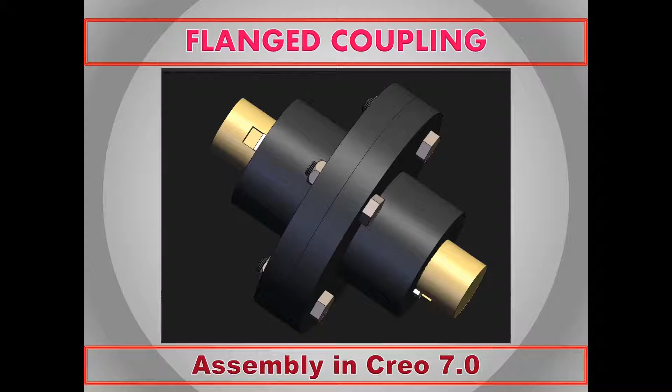Hello friends, in this video we are going to see the assembly of a flanged coupling in Creo 7.0. Here we can see the individual parts of a flanged coupling.

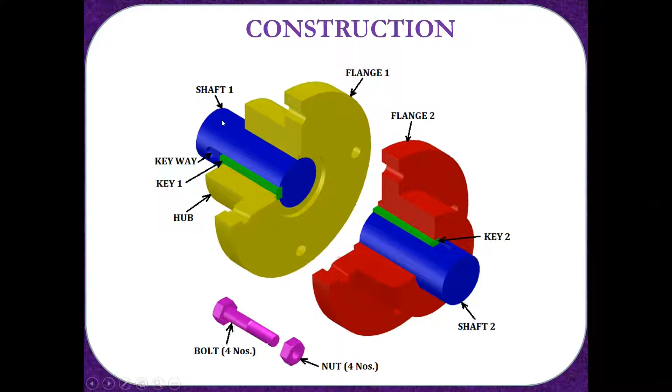While assembling the parts of a flanged coupling together, a shift of 90 degrees is provided between the first key and the second key. Here we can see the individual parts of a flanged coupling which are already modeled in Creo 7.0. To ensure the proper orientation of the key after assembly, red color is given on the thick end of the key and blue color is given on the tapered surface.

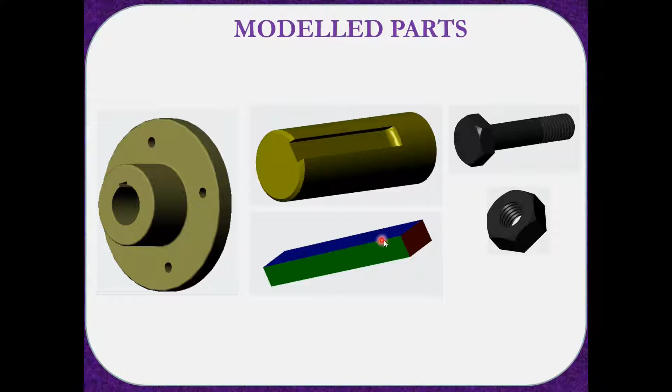Now let's move on to the assembly of a flanged coupling. Open a new file, select assembly. Let's change the file name. Remove the tick mark on use default template. Give OK. Select millimeter Newton second assembly design absolute. Give OK. Go to assemble and select assemble.

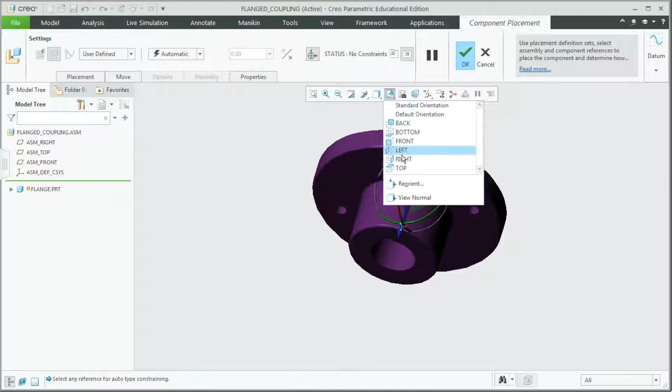Select the first part as flange. Open it. Change the view into right view. Select the default option. Now it is fully constrained. Give OK. Switch on the axis display and plane display.

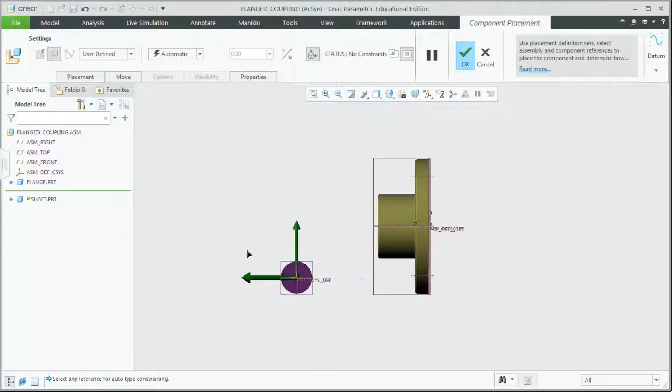Once again go to assemble, select assemble, select the second part that is shaft, open it, slightly move it, change the orientation of the shaft so that it can be assembled easily.

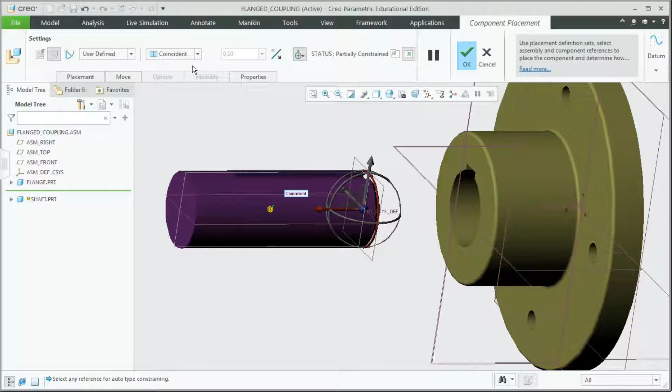Now select the axis of the shaft and axis of the flange and make it coincident. Now we have to prevent the rotation on this particular direction. Select the top plane of the shaft and the top plane of the assembly. Make it coincident. Slightly rotate it.

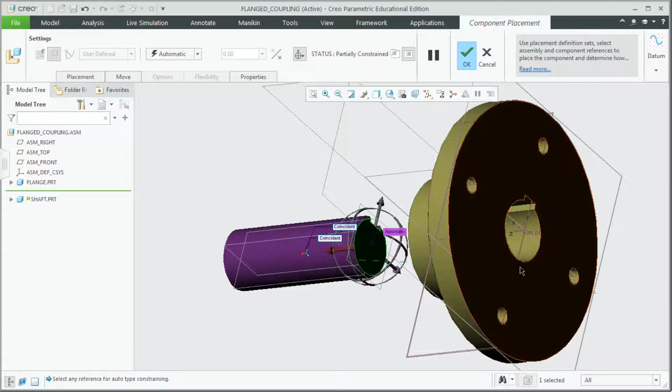Select the right end of the shaft and the right end of the flange and make the distance into 0. Enter. OK. Now we have assembled the shaft and the flange.

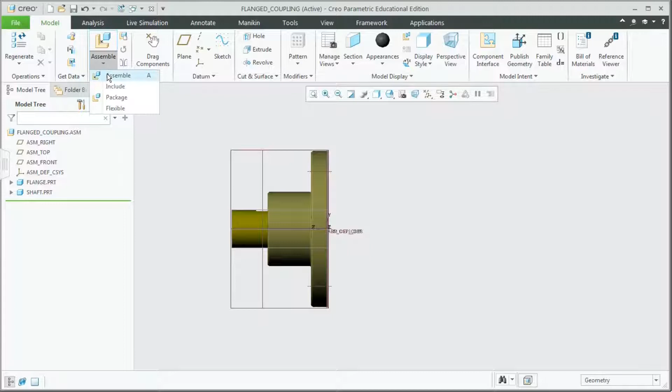Select the right orientation. Once again go to assemble and select assemble. Select the taper key. Open it.

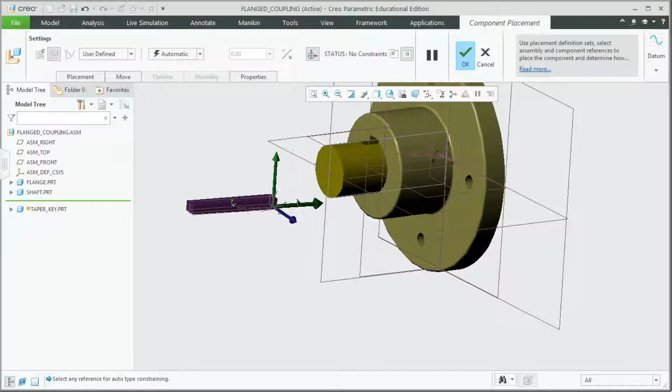Slightly rotate it and make both the axes approximately parallel. Move it closer. Slightly rotate it.

The bottom surface of the keyway and the bottom surface of the key should be coincident.

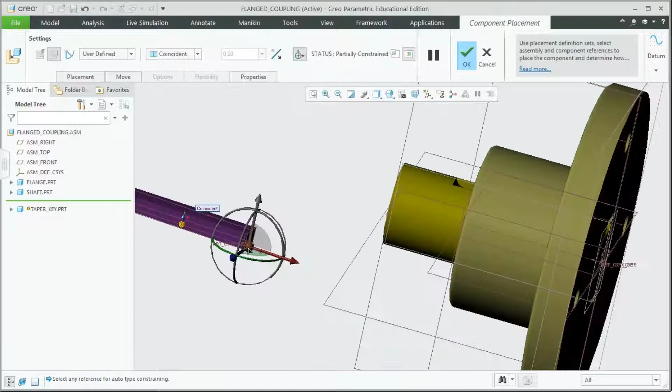Now we have to make the right end of the key and front end of the assembly coincident. Now let's make the front plane of the key and right plane of the assembly at a distance of 0.

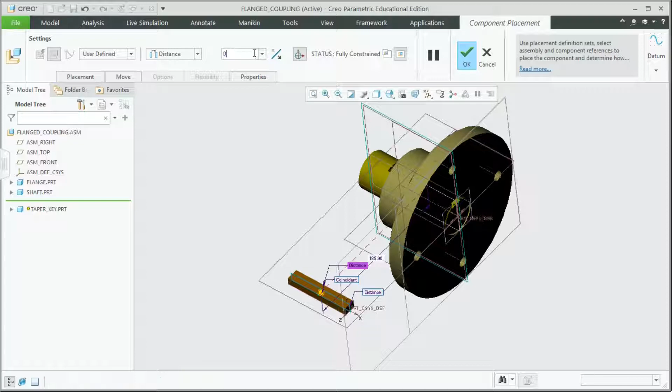Now we have assembled the key and kept it in proper orientation. Select the right view.

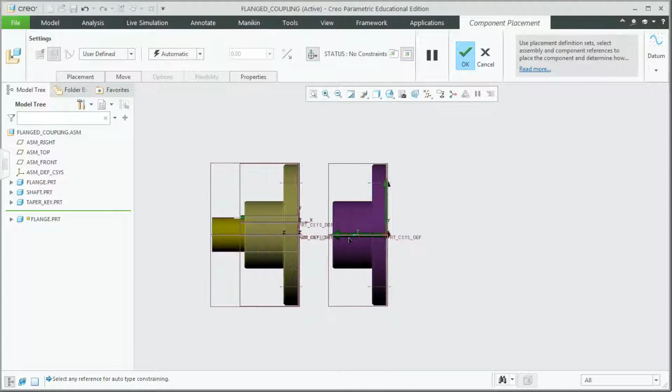Once again go to assemble, select assemble, select the same flange once again, click on open, slightly move it. Now we have to slightly rotate it and make this flange to face towards right. Move it closer.

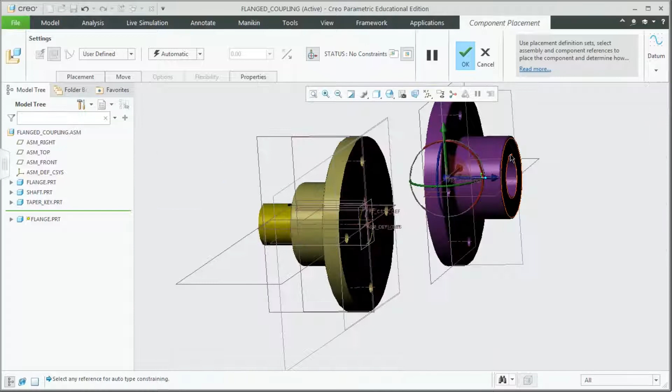Move it closer. Now we have to ensure a shift of 90 degree between the key of the first flange and the key of the second flange.

Select the top datum plane of the second flange and right datum plane of the assembly and make it coincident. Now select the axis of the second flange and axis of the assembly and make it coincident.

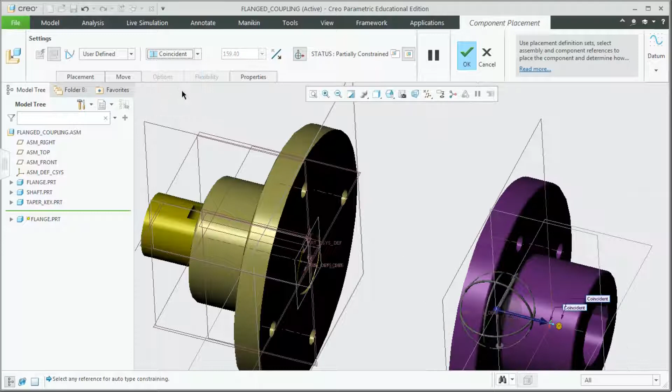Now select the right end of the first flange and the left end of the second flange and make the distance into 0. Enter.

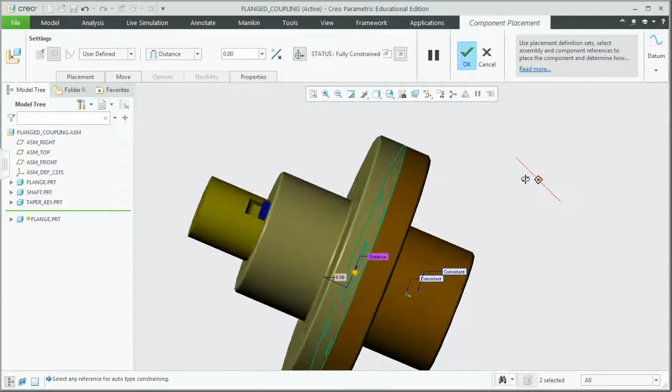Now we have assembled the first flange with the second flange, and we can observe a shift of 90 degrees between the first keyway and the second keyway. Click on OK.

Once again go to Assemble, select Assemble, select the same shaft, open it, rotate the shaft and make the axis approximately parallel to the axis of the assembly. Move it closer.

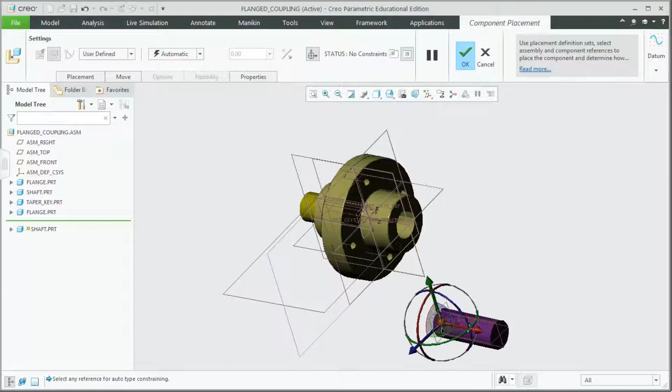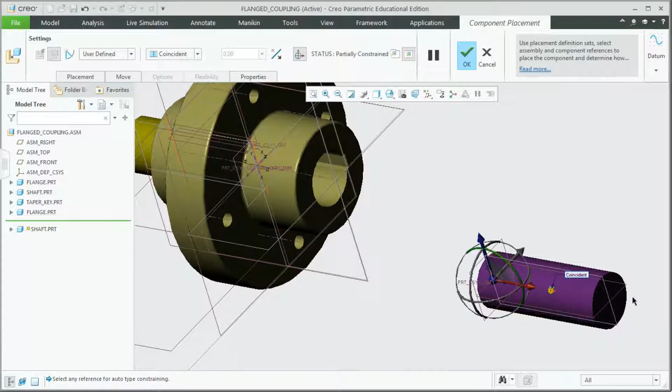We have to make the keyway and the key approximately parallel. Let's slightly rotate it and make it approximately parallel. Now select the top surface of the shaft and right surface of the assembly and make it coincident. Let's slightly rotate it and move it closer. Let's make the axis of the shaft and axis of the assembly coincident.

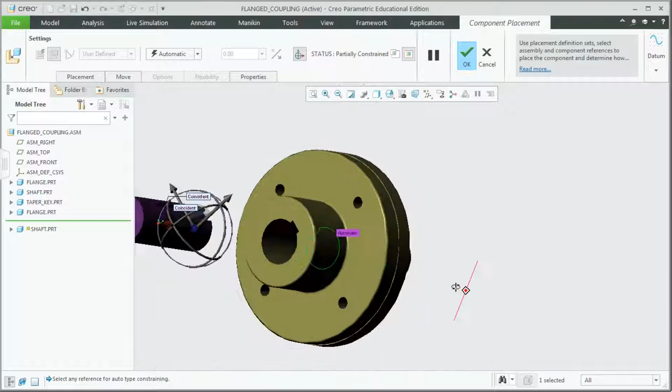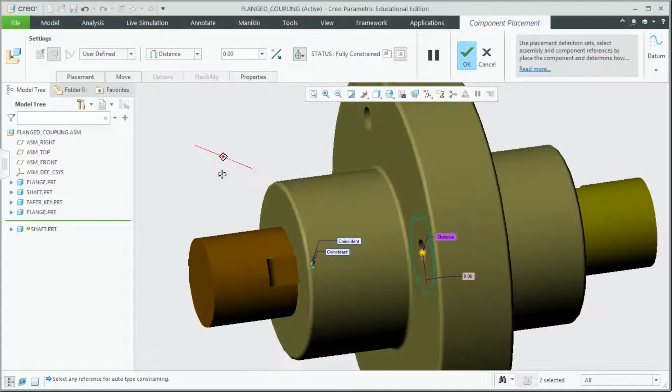Now we shall make the inner end of the first shaft and the inner end of the second shaft at a distance of 0. Enter. Now we have assembled the second shaft and the second flange. Now it is fully constrained. Click on OK.

Now we need to assemble the second key. Once again go to Assemble, select Assemble, select the taper key, click on Open, slightly rotate it and make the orientation approximately parallel.

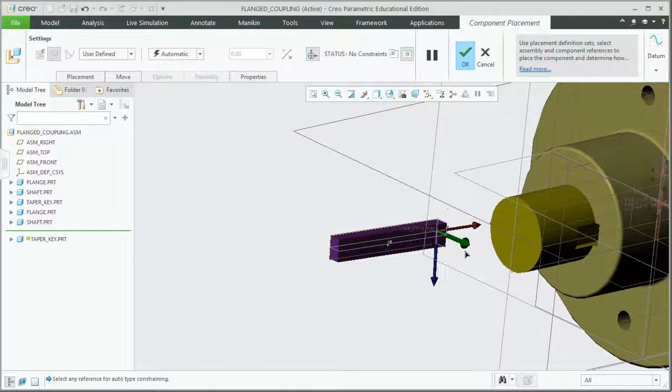Now let's make the bottom surface of the keyway and bottom surface of the key become coincident. Now we have made it. Now let's make the front datum plane of the key and right datum plane of the assembly coincident.

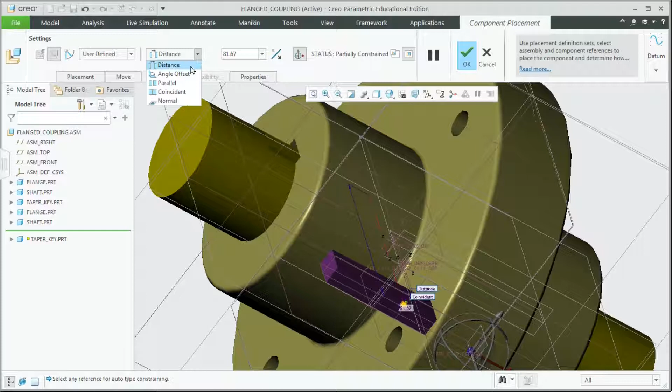Now let's make the right datum plane of the key and the front datum of the assembly at a distance of 0. Press enter.

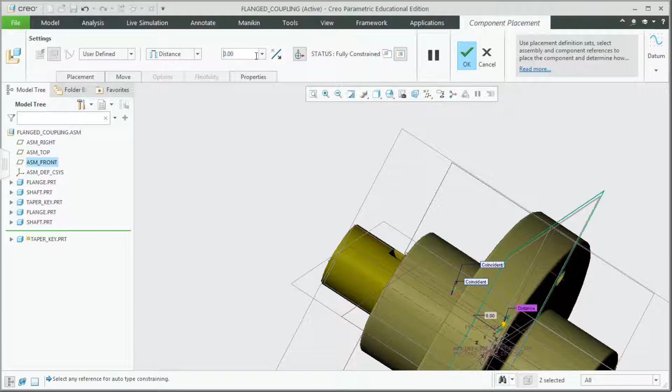Now the second key is perfectly aligned between the second flange and the second shaft. Now the part is fully constrained. Click on OK. From this view we can understand that we have kept the tapered surface on the top of

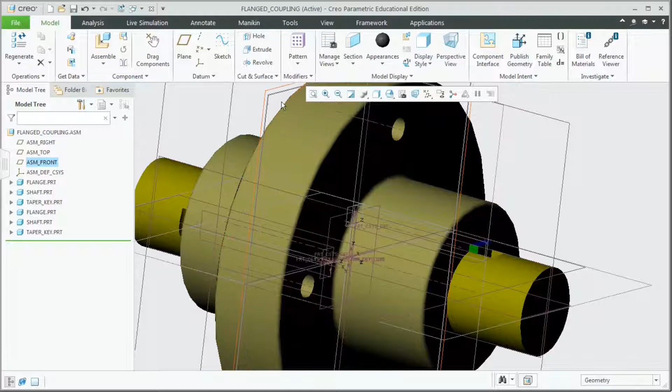the key, and the thick end of the key, which was given red color, is facing the middle portion of the assembly. We have assembled the shafts with the flanges with the help of key and keyway arrangement.

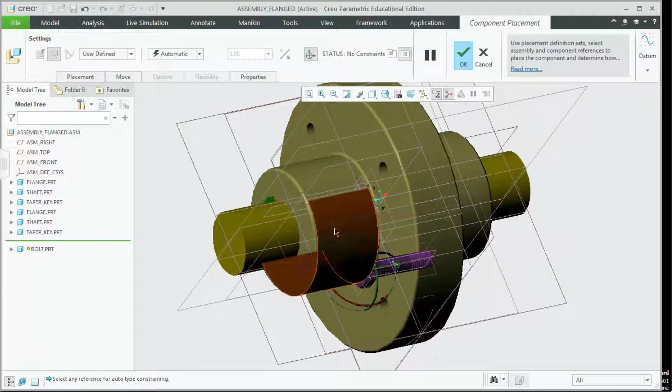Now we need to couple the two flanges with the help of bolts and nuts. So go to Assemble, select Assemble, select the bolt, open it, rotate the bolt, make the bolt closer, select the axis of the hole and axis of the bolt, make it coincide.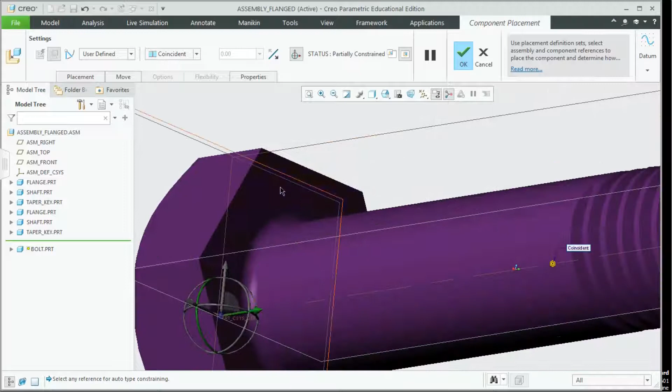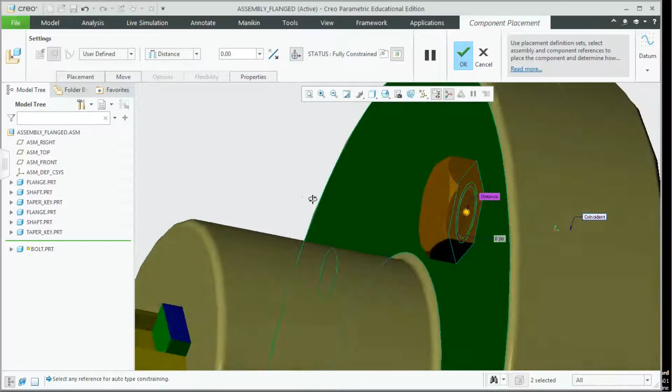Slightly tilt it, select the bottom surface of the bolt and the outer surface of the flange and make the distance 0. Now we have inserted the bolt in its proper orientation. It's fully constrained. Click on OK.

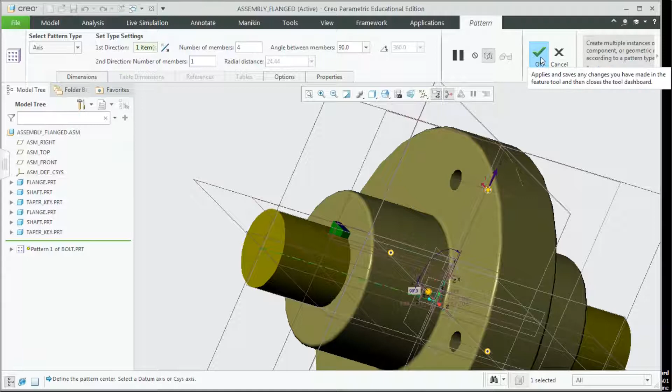Instead of assembling individual bolts separately, let's select the bolt option, select the pattern option, select the axis option, select the axis of the assembly. Number of items are already 4. Click on OK. So we have assembled all the 4 bolts in its proper orientation.

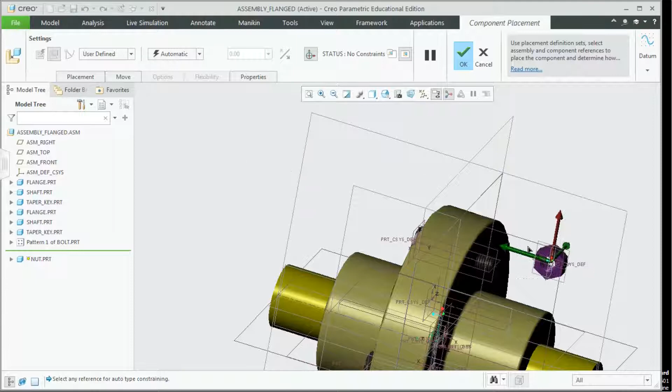Once again go to Assemble, select Assemble, select the nut, click on Open, move the nut closer to the flange, rotate it and make the flat end of the nut face the flange. Make it closer, slightly tilt it.

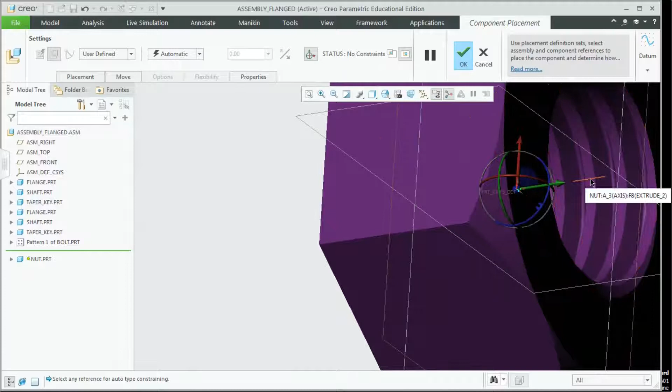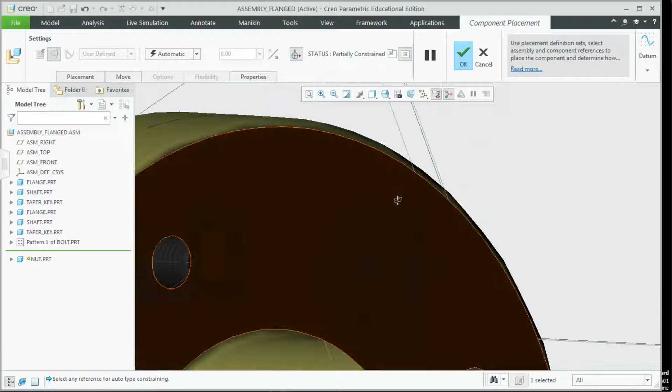Select the axis of the nut and axis of the bolt. Make them coincide. Now select the inner surface of the nut and the outer surface of the flange and make the distance 0. Now we have assembled the nut with the bolt. It is fully constrained. Click on OK.

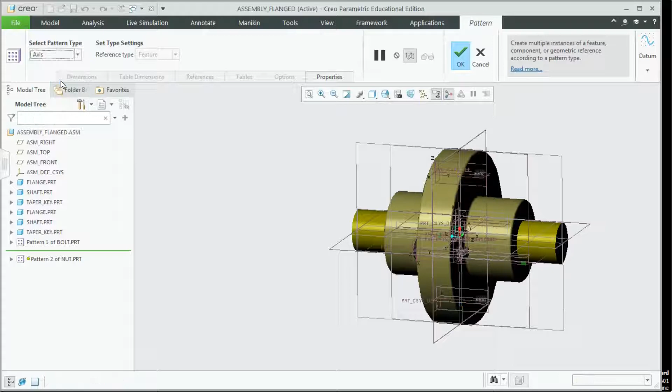As we have done earlier, instead of assembling all the 4 nuts individually, let's select the nut and select the pattern option. Select the axis option from the pattern type. Click on the central axis. Number of members are already 4. Click on OK. Now we have assembled all the 4 nuts with the bolts.

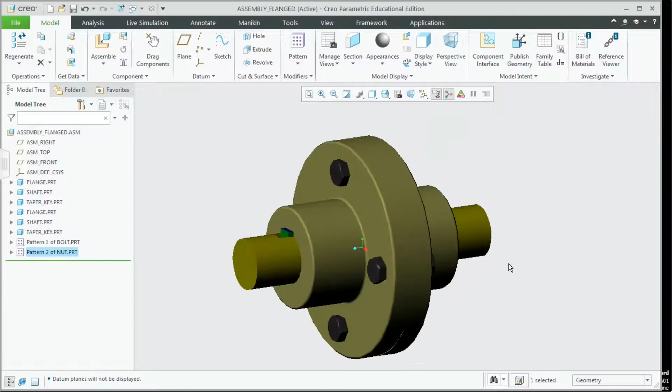Let's switch off the reference axis and reference planes. Now we have successfully completed the assembly of all the parts of the flanged coupling. Also, all the parts are assembled in proper orientation and alignment.